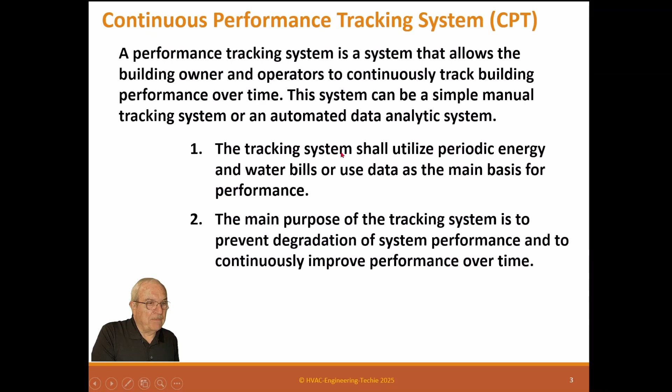The tracking system shall utilize periodic energy and water bills or use data as the main basis for performance. Tongue twister there. The main purpose of the tracking system is to prevent degradation of system performance and to continuously improve performance over time. Now, this does work. It works very well if you actually look at what you do and say, well, that's not quite perfect, what can we change to actually make it better?

It can actually improve. I had a customer one time that hired me, this is years and years ago, a big hospital, and they said, we need to improve our energy. We'd like to hire you to do that. I said, oh, great, I can do that. Well, you don't understand. We just want you to come in once a year and look at our facility and talk to our operators, and then we'll make a change. We'll see what happens. And we'd like to save 10% on our energy. I thought, well, that might be kind of hard.

So we did that. And we actually did it 5 years in a row. We come in, we look at what they got, propose something. They spent the money to do it. And we actually reduced, over a 5-year period, their consumption by 50%. Now, that's really impressive. But I got to tell you, they were really bad to start with. So it wasn't too hard to do, but it does work. If you measure it and see what you're doing and make a change and improve it, you will improve a facility's operation.

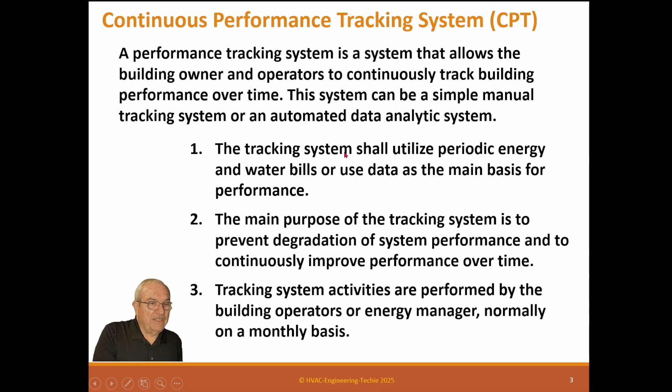Tracking system activities are performed by the building operators or energy manager, normally on a monthly basis. So the monthly performance evaluation is published to the owner, operators, and occupants in an effort to keep all parties who can affect the building performance informed on performance progress. Now, why would they care? Well, if you have a leased building and you have lessees in the building, and as the energy rises, guess what? Their bill goes up.

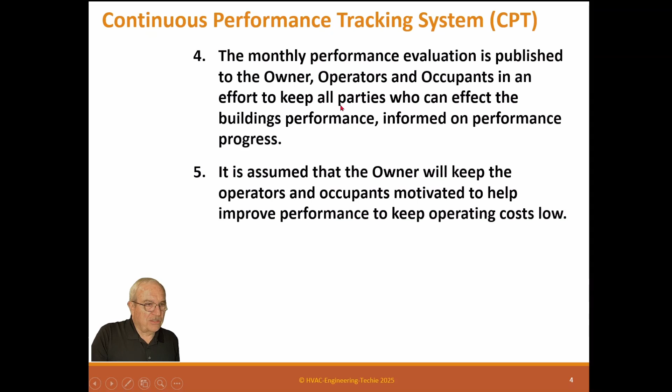So the occupants have an interest in keeping the bills low so they don't have to pay so much. And of course, the owner wants to keep them low so his profits are higher. And the operator should want to keep them low just to show the owner they're doing a good job and possibly get a raise. So that's why it's important to everybody. And we publish it to them so they'll see whether we're doing good or bad. It is assumed that the owner will keep the operators and occupants motivated to help improve performance to keep operating costs low. So that's the perfect world we're looking for.

So the basic process is you collect the data, your utility bills for electric, gas, and water, or anything else, like if you have district steam or district hot water or district chilled water, you have invoices for those. Anything that's costing you money to operate your building in a utility sense for energy or for performance, you collect those monthly and then you analyze them in some kind of form.

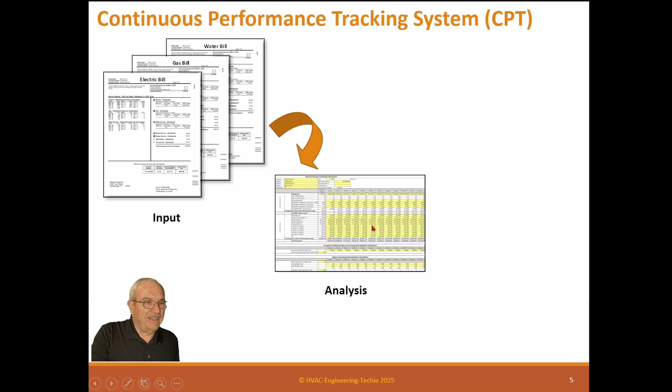Either you have an automated system or you have a spreadsheet set up for it, and then you actually publish that to occupants in some way they can understand. And normally we prefer to do that with graphs because people can understand a graph. These numbers are kind of hard to figure out what's going on here unless you're the guy doing it.

And we'll explain all this later on. But this is the general process, and you do that every month. You get this data, you analyze it, and say, well, okay, this is where we were, and you compare it to past data. So you got one of these spreadsheets set up for last year, and you said, okay, we're doing better than we did last year.

So we'll explain how to do all that, and then you publish the data, and then if you see improvements, you make improvements. You do the whole thing over again. You do it every month, and you tell where you're going. And these data, of course, show current and month to date, that kind of thing.

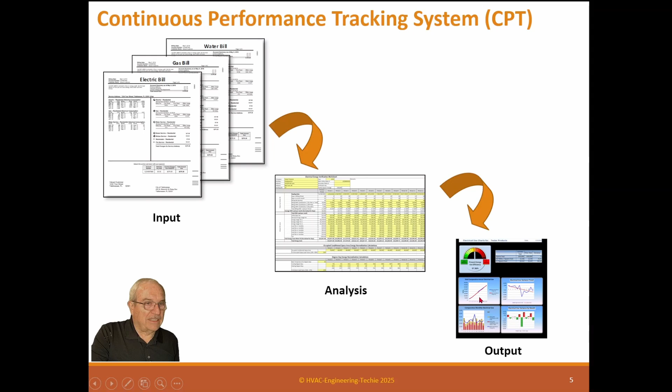So manual tracking systems, which are by far the cheapest and easiest because they just cost you labor to do. They don't really cost anything. Create a spreadsheet that can track monthly energy use that allows normalization for billing days, occupancy, and degree days, and for weather.

The reason we normalize the data is if you have a building that operates a year with 1,000 people, and then a whole bunch of tenants move out, and you have 500 people, the energy that year is going to be much different than the year before. So we want to normalize the data so we're not penalizing ourselves for something that we have no control over. So that's what normalization is for.

Now, normalization for days just means that, unfortunately, utilities don't always bill the same amount of days per month. So say in 2024, in January, they may have billed for 30 days. And the next year, they may be 28 days in their billing cycle. So that's a problem. We need the days to be consistent between years when we're analyzing data.

So this is all it does. It takes everybody to a 31-day situation, a 30-day situation, and it just keeps them all equal. So that's normalizing for days. And then for weather, you can really get sophisticated and do all kinds of analytic systems, but for simple, we're just using degree days. So if one year it's really, really cold, the next year is hot, the degree day will normalize it somewhat. Not a great deal, but somewhat.

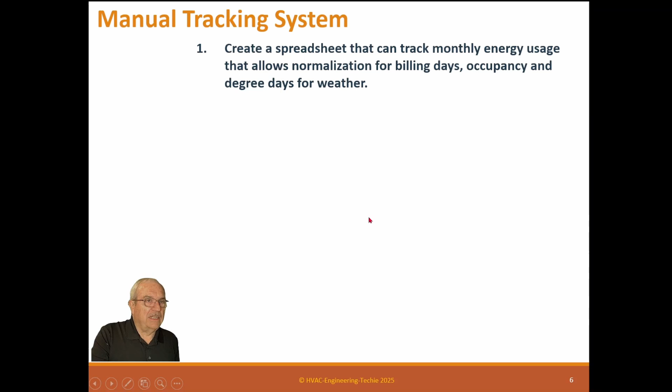So normally a building has about 20-25% external load. Depends. If a building has a lot of people, maybe 30%, 35%. But that's it. The rest is all internal load, which is not affected by the weather. So we still want to normalize that data, and that's why we do that. The spreadsheet shall have at least 12 months of past data to compare for present usage. The spreadsheet shall have automatic graphs of energy and water usage that can be used for publication.

Establish a methodology of collecting usage data and cost. Normally task accounts payable, accounting, to forward utility bills to the energy manager or lead operator, depending on who you have doing this. Obtain approval to download billing data directly from the utility. You can, if the owner approves it, get specially set up with a utility to just send those bills to you also. So you can have those. If the owner says, this is the guy we're having doing energy management, they can do that.

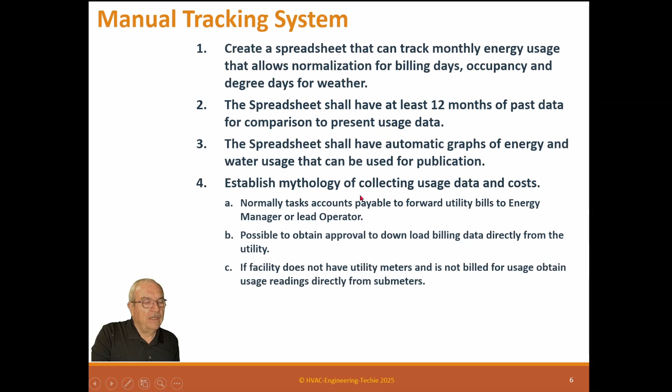If the facility does not have utility meters and is not billed for usage, obtain usage readings directly from sub-meters. Now back here, where it says normally have accounts payable forward utility bills, that actually is pretty specific. You don't want accounting to send you a readout of their computer system, their accounting system, that has the cost by month, right? Or maybe it might have the usage, but probably not.

But you need the details on the bill. So they need to actually send you a copy of the bill because there's a bunch of things you need to see that they don't understand. So basically, don't have them just send you a list of costs.

You need something more than that. If the facility doesn't have utility meters and you're not billed for utility, obtain readings from sub-meters. And you say, well, how could that ever be? Well, I've done a lot of work for utilities, and most of them don't meter their buildings. They call it line loss. On electrical, if they don't have an electrical meter, they just call it line loss.

Or they do have electric meters, they just don't do anything with the data. Some of them actually read it, but they don't do anything with it. Because they're not paying for it, right? It's their power. They're selling it to you. And the same with gas. I've seen many, many buildings without gas meters. So it depends on the circumstances. Just because you and I have meters doesn't mean everybody has meters.

So then you create a performance measurement plan. The plan shall include who is responsible for what activity and the time schedule for each activity. So you have to have a plan so this is done consistently. This is really important. Consistently is important. If you skip a couple of months because you're busy or whatever, that can't happen. It needs to be a consistent process. And so on manual systems, it just has to become a normal thing you do all the time.

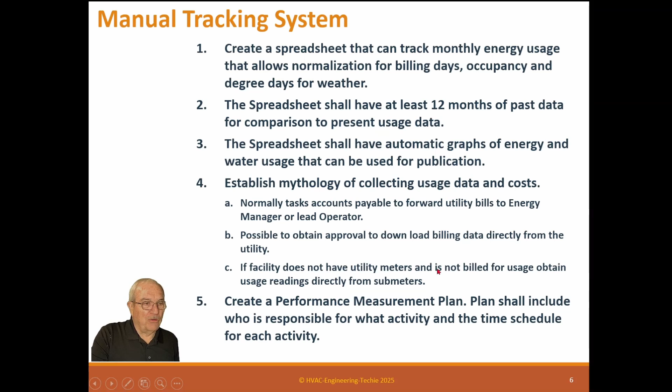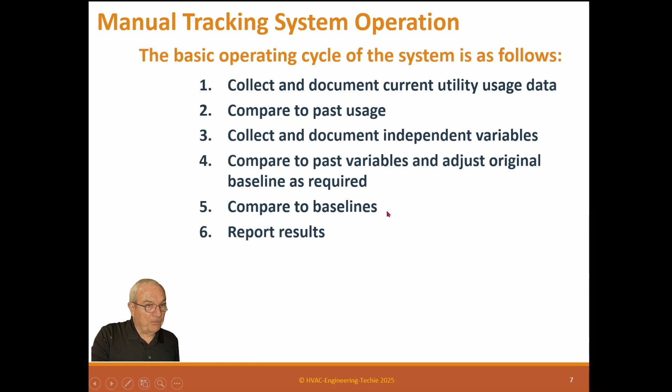The basic operating system is as follows. Collect and document current utility data usage, compare the past usage, collect and document independent variables, compare the past variables and adjust original baselines as required, compare the baselines. Now, baselines are something maybe if you're tracking against Energy Star Portfolio Manager, or you're using these check sheets, these spreadsheets to track whatever you're doing. You compare: how do we look? How does this building look amongst other peer buildings? Report results, make changes for operation improvement, verify implementation of changes, return to the first step above.

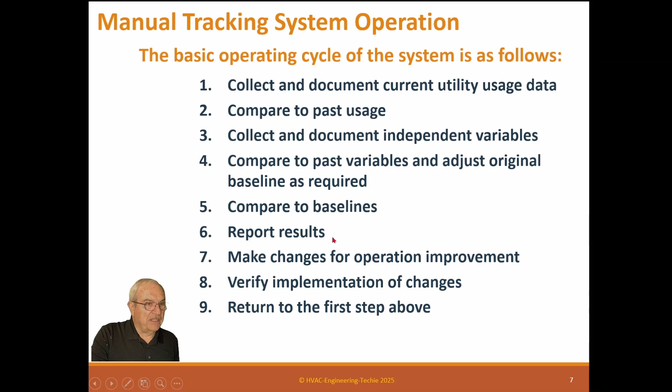So this is just a process, and you do it all the time. And this actually works really, really well, and it's really easy to do. This may sound complex, but it's really simple to do. And it's not been done everywhere. Not everybody does it, so it may be a little new to some people, but it's really an easy process.

Here it is. Basically, there's your measurement plan. You collect the data. You analyze the data. You normalize the data. You look at baselines, how you're comparing it. You compare results to past year. You publish those results. And then you make changes and you do it again. It just keeps going in a circle.

I would say the most important part is basically the analysis of the data and making changes. This analysis to make these changes is what's most important. You're analyzing the data, where are we at, and then you have to work on what you can change, and you make a change. Sometimes you make a change and you go the other way. Wait, that didn't work. And so when you measure that, you've got to go back and rethink that.

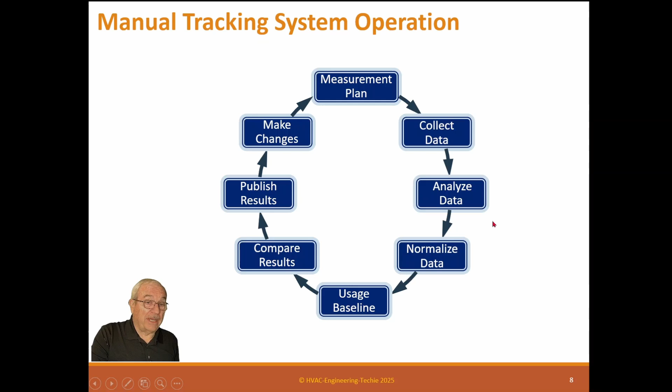If the system is new, the commissioner shall perform the first cycle of the performance tracking system. If it is an existing system, the commissioner shall review the first cycle of verification performed by the owner to make sure everything's going okay. The commissioner shall compare present performance results to past results and shall determine if performance is improving or degrading. If performance is degrading, the commissioner shall initiate an RCx, a retro-commissioning process, to find the root cause of the performance degradation and make changes to improve the performance during the next cycle.

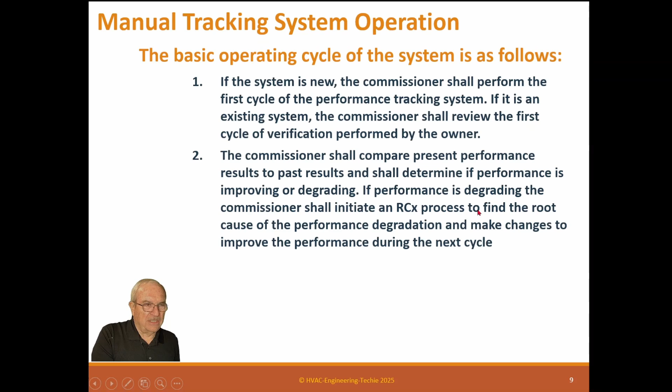Now, the key to that and to retro-commissioning is basically finding the root cause. Most people don't do that. They end up finding a symptom, and they'll make a change for a symptom, which makes things worse. It doesn't make things better. So you have to get adept at finding root causes. It takes a little bit of effort to do that. But once you've done it, you can actually make a change that will make a difference.

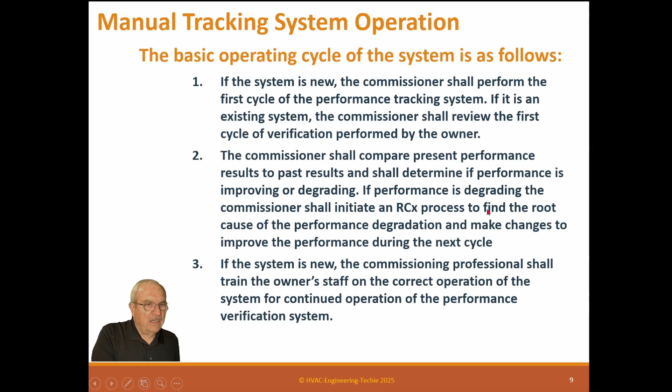If the system is new, the commissioning professional shall train the owner's staff on the correct operation of the system for continued operation of the performance verification system. Using the output data and graphs from the system, the owner and commissioners shall publish the results to the managers, operators, and occupants for each cycle of the system. If changes are made to improve performance that modify system operating parameters, the commissioner shall modify the facility operating guide to reflect those changes.

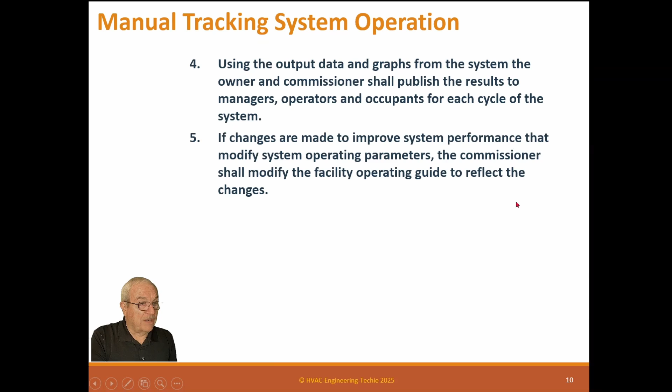In other words, if you make a change that really helps and you don't tell anybody, you don't write it down, and they change operators, he comes in, he doesn't know, he may take it back to the way the system was operating before, which could degrade your performance.

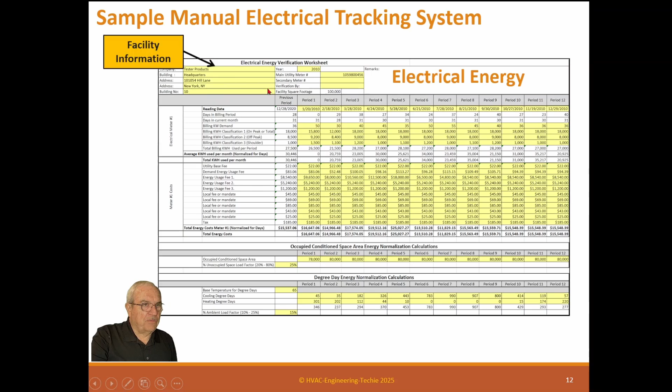This is the facility information up here. Here's the electrical meter data and what the rates are and all that stuff. These are the individual months. This is the billing usage data. And these can become quite complex for electrical because they can have on-peak, off-peak, shoulder peak, 3 or 4 different measurement areas where they're measuring. So this has a few things to fill out.

Now, on this particular spreadsheet, the yellow is the cells you actually put data in. All the rest of the data is automatic, so you don't put it in. So then this is the bill cost data, and you input the cost data. It doesn't calculate that automatically, except for a few of the use data, because there's a whole bunch of tariffs placed upon power. The federal government does it, the state governments do it, municipalities do it, so there can be a whole slew of separate fees and taxes, overrides, all kinds of things on utility bills.

So when you get a utility bill, I was hopeful that you would not have any more. If you have more, you're going to have to change a spreadsheet, and these spreadsheets are not locked. Well, they are locked up, but the password is given to you written on the document, so you can always open it up. And the reason is trying to get you not to overwrite these formulas. Otherwise, you got to figure them out again. So it's not hard, but it may take some time.

So this here is the occupied square foot data. So that is the data you put in from the previous year to this year. This is how much square foot is actually occupied. So if you have a lease building and only 50% of it's occupied, you want to change that so you're only comparing to occupied space.

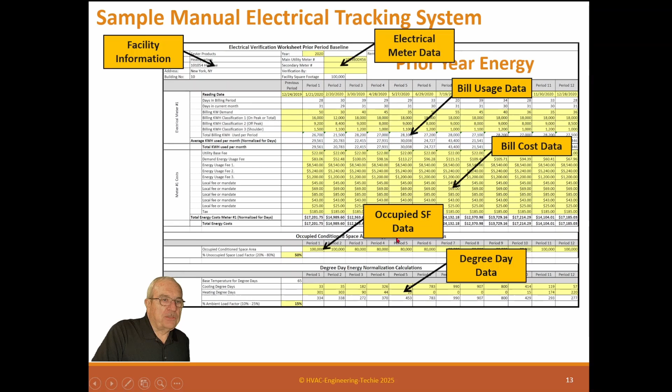So first, when you first start, you have to go back and create all the last year's bills. And you get all the last year's data. Now you can continue to do your first data. So the occupied square foot, degree day data from the past is there. This is the output of that system. It's all automatic. And it basically gives you a sheet you can print out and put in a report.

It has a current month efficiency. And what happens is if you get better and better, the speedometer goes toward the green. If you get worse and worse and worse, it goes toward the red. And then it gives you a percentile number of how efficient you were compared to last month.

And then this is the EUI, which is the Energy Use Intensity Index. And this is a thing that ASHRAE uses a lot to kind of compare facilities to facilities. It gives you your cost per square foot and that sort of thing. And then it has the comparative annual use trend. This tells you if you're getting better or you're not getting better, and it shows you what this year looks like and what last year looks like and where you're at.

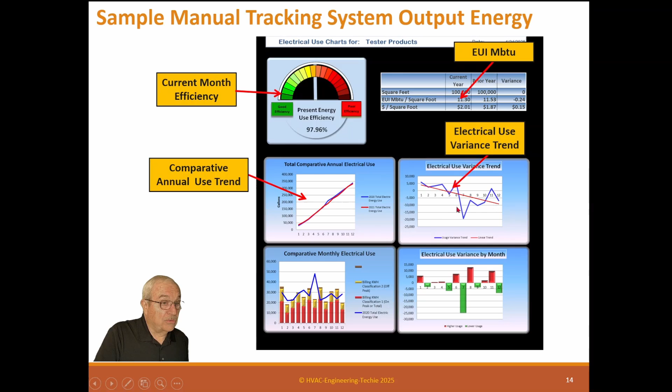This one shows you the variance use, the trend variance. So it says your trend is actually down, so you're actually getting better, which is really good. This is the comparative monthly use, shows you what you did each month. And this is the electrical variance by month. So it tells me in January you spent a little more, in February you spent a little less. These 2 months were really good.

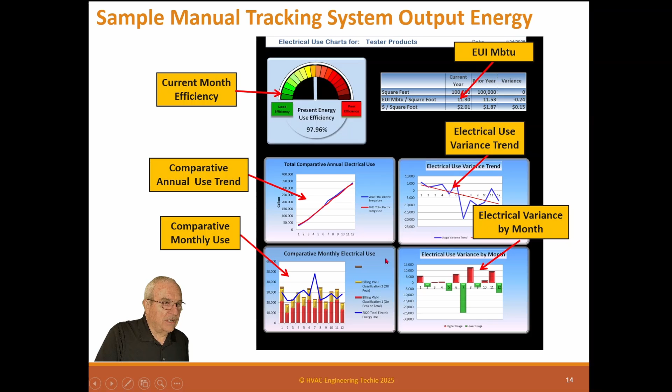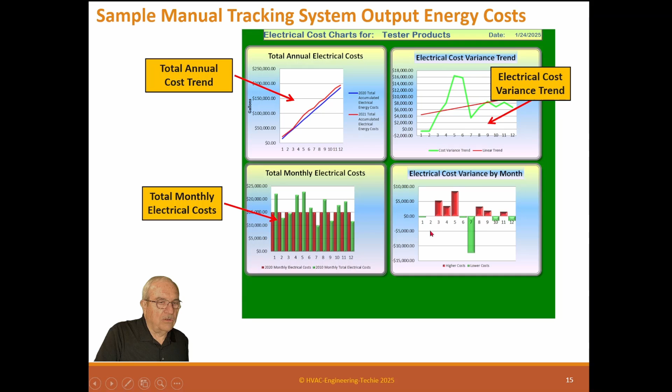That one was really, really good. So it shows you where you're doing good and where you're not. So it actually makes it easy to tell where you're at without having to worry about the numbers. And then this is for cost, same thing. So it has the total annual cost, electrical cost data trend, total by month, and the electrical cost variance by month. So it helps. And then we do the same thing for gas.

The gas sheet is exactly the same. Gas is slightly different sometimes because it may not be in actual cubic feet or therms. It may actually be in units. And up here is a definition of how many therms are in a unit. So now you can put the usage in. And the usage is actually, this is the dates up here. The usage dates are there. And these are, of course, the cost data. And this is the occupied square foot again, just like electrical.

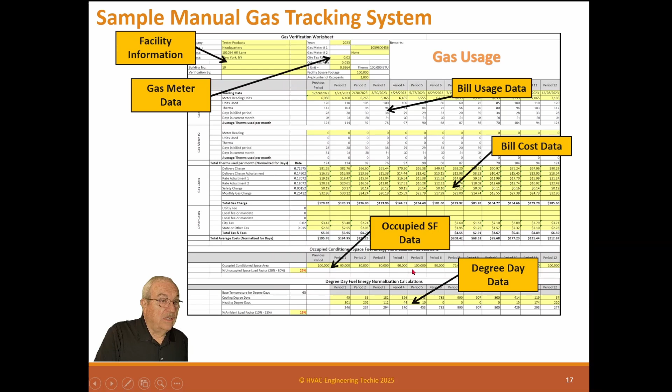And this is the degree day, just like electrical, because gas is also affected by weather. And then, of course, it's the prior year, which is exactly the same thing. And then it puts out another chart, which is for gas. And it has a speedometer, which tells you how efficient you are. Then it has GUI, which is gas use intensity. And this is a comparative annual use trend.

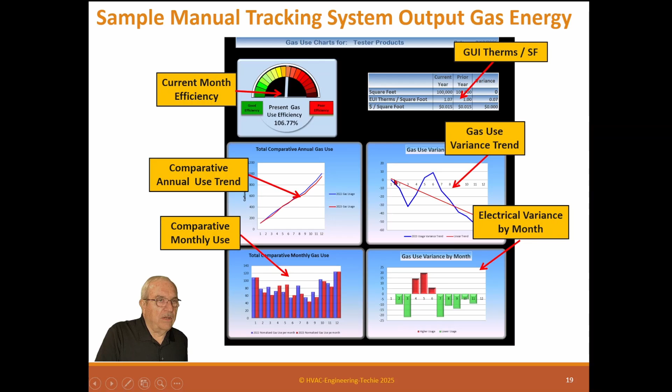And this is the gas use variance trend, shows you're doing better. This is the monthly data. And this is the month variance data. So these are helpful graphs that will help you be able to publish the data to your occupants and operators and owner. And the costs the same.

How you calculate water for a building if you're designing a new building is based on how many people by gender are in the building. Because male and female actually use the restroom differently, and maybe more use on one or the other. So they've recorded all this stuff and they've got design data down. So what you need to do is track how many people you have in the building, and that can actually be difficult. So it's easy if you have a card access system.

You can do it automatically. You just get that report from your operation, or maybe you got it directly, and you just input how many people you have in the building. The only difference is it's full-time people. So it's people that are there for a full day, 8 hours. Or if you have a lot of part-time people, then it takes those, adds them together, and divides by 8. So this keeps it so you can compare to last year how your water usage is.

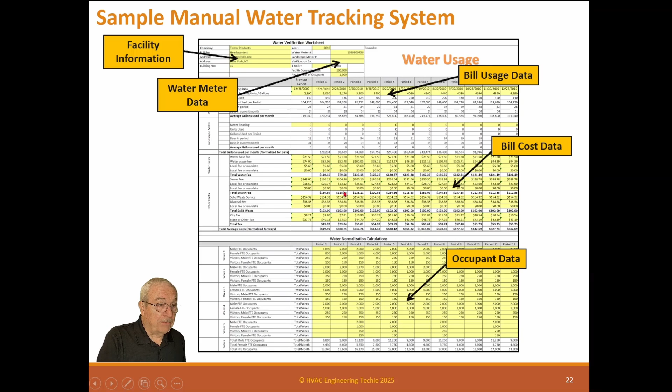Now, water is not a big deal for cost in most places. It's getting to be more expensive, but what it's mainly for is we don't have a lot of potable water. It's going to get more and more expensive, so water is going to become more and more important. And of course, prior years, the same thing.

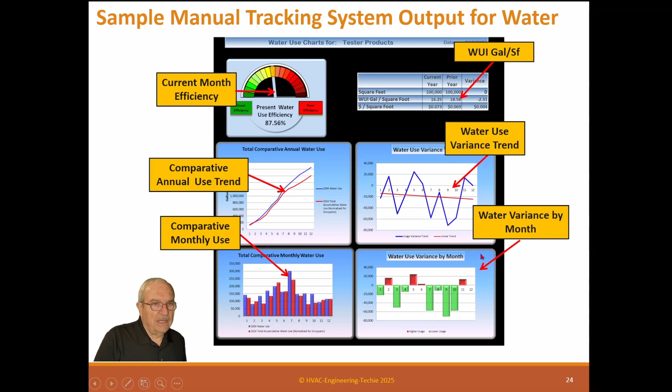And then comparative monthly use. And then, of course, the variance difference. So it's the same thing. It's very helpful. And then, of course, we have cost as the same thing. So basically, these graphs are very easy to show people.

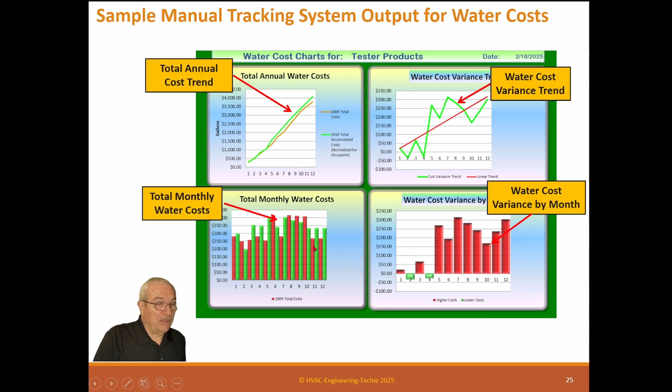Now, I might make a mention here, the data that's using these is just made up data. I didn't actually use a facility for this. I just had my water bills and I used those, but the data is all made up. So basically, I used it to test the graphs. So don't get wound around on why these look the way they do. It's just data put in there to make sure the graphs actually work.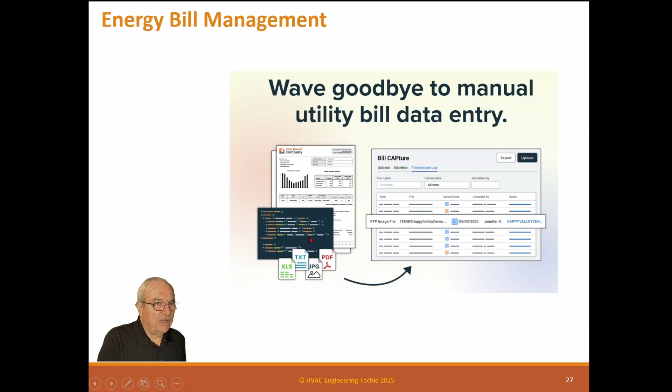Now, that seems, well, that's way too much work. Well, it is some work, but remember, the benefit can be great. So we're talking about benefits in the thousands and thousands of dollars, so it could be important. You can also automate this. There are many, many different ways to automate it, and there's companies out there that sell you software that will gather the utility data, analyze the data, and do it all automatically so you don't have to be involved in it. It'll do cost avoidance calculations, tell you what to change.

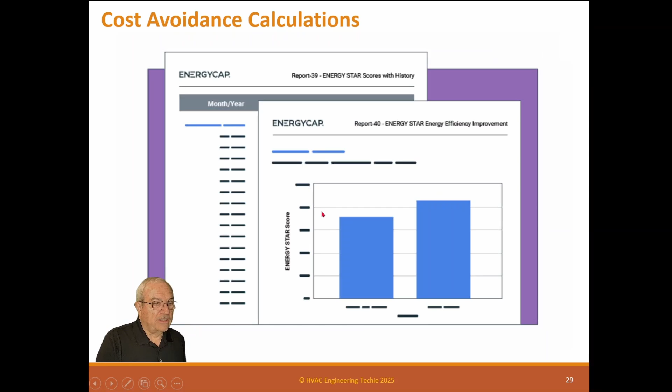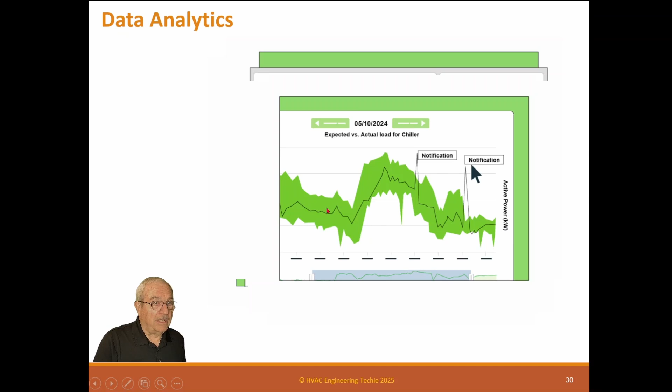A lot of them actually have software that looks at the utility bill itself and sees if you're on the right rate, or if changing rate is a better idea, or if there's any way you could offset peak periods and things like that, that don't involve any real things in the field. They involve manipulation of the data in different cost avoidance calculations, and have data analytics, a big computer system, so it's got lots of capacity for data analytics. Benchmarking, it can do automatic benchmarking to systems like Energy Star.

Now, these are somewhat expensive because they have upfront costs to come in and look at your system and connect their system into it. And then there's a subscription cost of ongoing costs of these systems. So you'll have to evaluate those costs. I unfortunately don't have the cost of those systems, but they are available if you want to automate this. And then, of course, if you have a full data system in there, a full fault detection system, they can include this as part of their package. That is probably a more simple thing to do than to just try to do this by itself.

So the deal is if you don't track use, you can never improve it. And one of the biggest problems we have in this country, or all countries around the world, is degradation of performance. When we first build a building and we first commission and test it, that's probably as good as it's ever going to get. And after that, if the operators don't fully understand how to keep that thing running smoothly, it will degrade. And some of them degrade very, very quickly. I mean, I'm talking about 10 to 30% performance in 3 or 4 months, or at most 2 or 3 years.